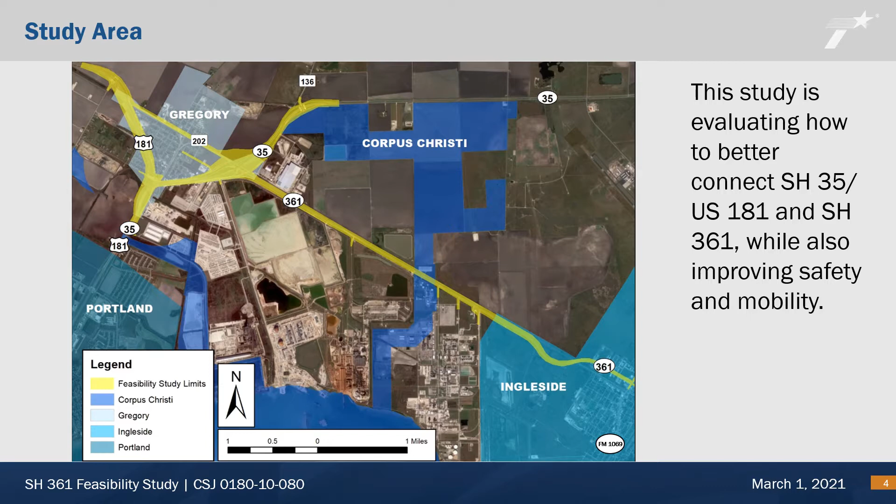During the feasibility phase of project development, engineers and planners conduct studies to define problems, gather data, recommend solutions, weigh the potential environmental impacts, and analyze a preferred concept. This is all done with input from you, our stakeholder.

You might be wondering if the project already has started given all the construction around the study area. In fact, TxDOT has an ongoing project to improve US 181 from FM 3239 Buddy Ganem Drive to FM 2986 Wildcat Drive. This project is widening the roadway to allow for 3 continuous 12-foot travel lanes in each direction, adding overpasses over Childress Street, Sunset Road, and SH35, and providing ADA accessible sidewalks and ramps on the frontage roads. The US 181 project and the SH361 feasibility study are evidence of the amount of growth taking place in and around this part of the state.

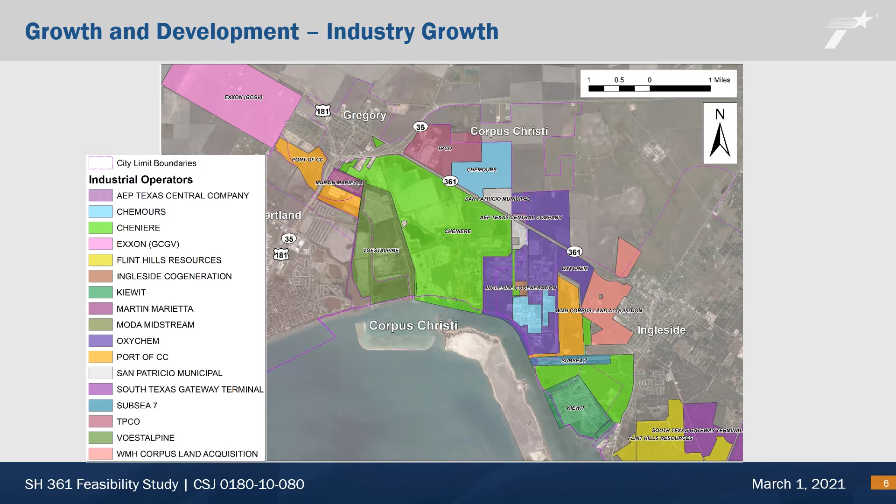The region has seen an increase in the number of industrial operations utilizing SH361. This area has good access to highways, railroads, and the port, and will likely continue to attract similar industries and expansions of existing operations.

Additionally, the city of Gregory and surrounding areas are also seeing an influx of new housing units, both multifamily and single-family residential, as well as proposed commercial sites. This growth is a driving force behind future traffic demand and one of the reasons TxDOT is exploring possible improvements to the SH 361, US 181, SH 35 interchange.

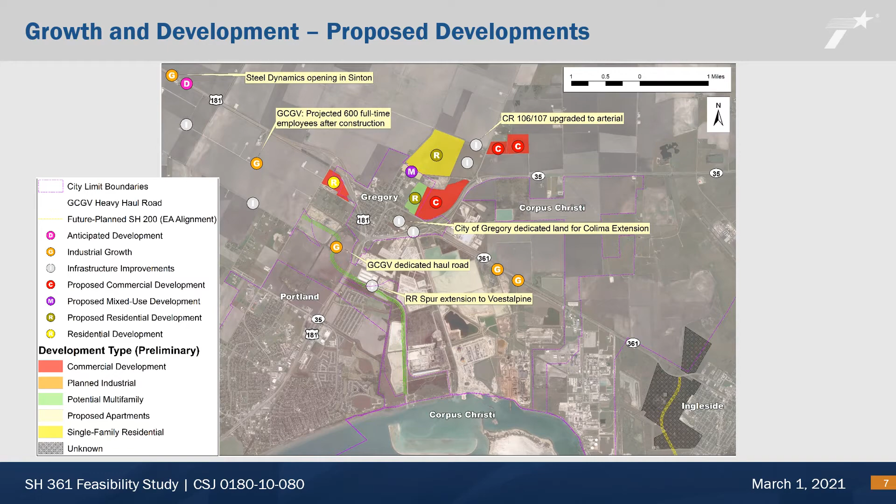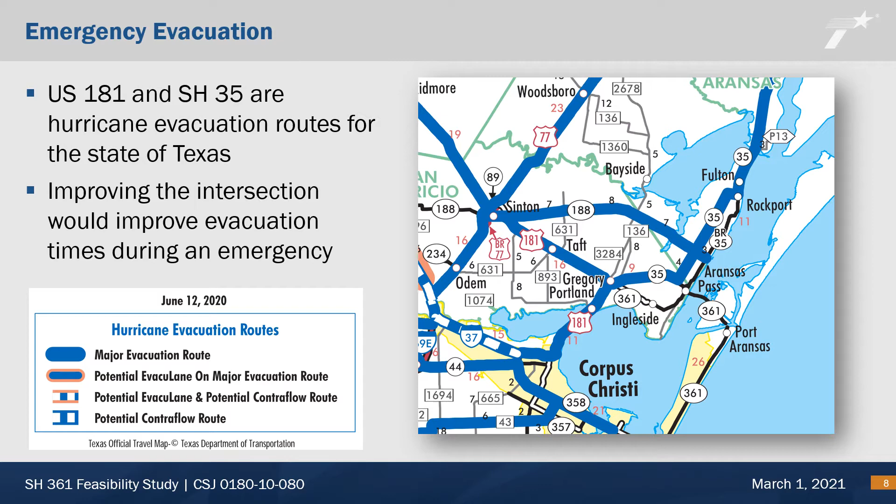Improving operations and safety at the intersections of SH 35, SH 361, and US 181 is particularly important, as SH 35 and US 181 are designated hurricane evacuation routes and need to be able to quickly and efficiently move people out of the area in the event of an emergency.

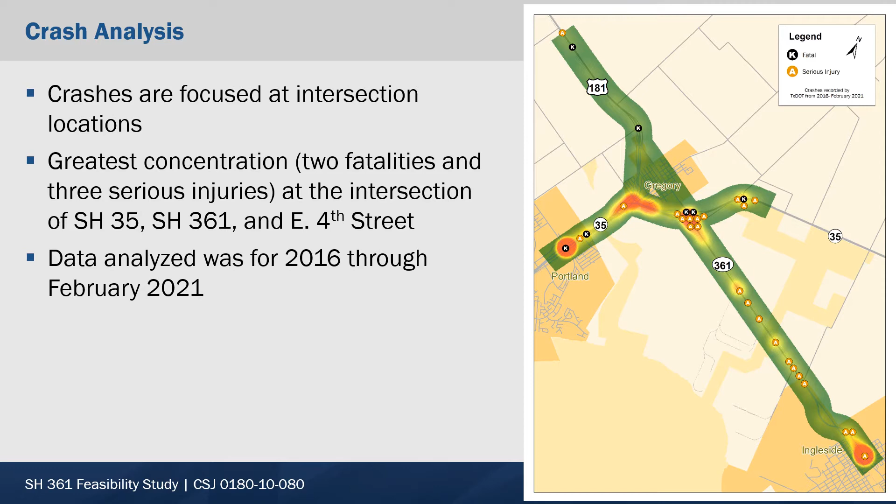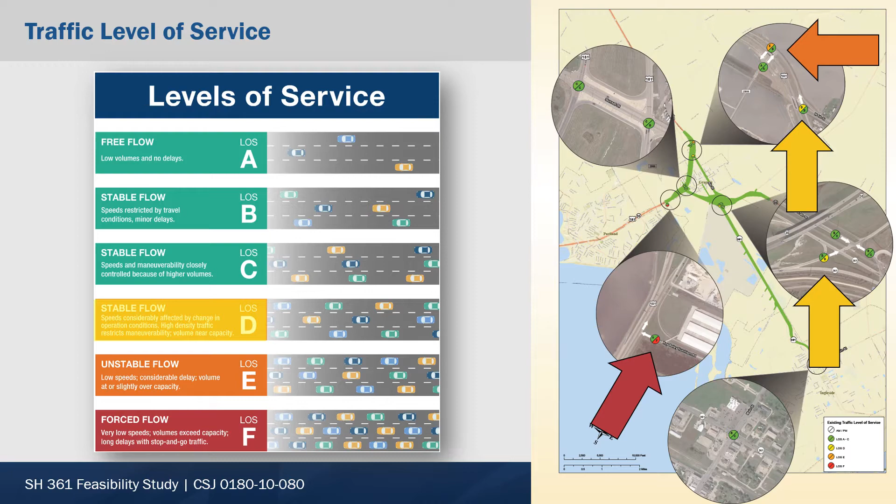Based on an analysis of existing conditions, needs, and challenges, TxDOT identified that the purpose of the study is to evaluate and analyze possible solutions and alignments to manage traffic congestion and delay for future year conditions, reduce traffic delays associated with railroad crossings, provide direct connections for heavy traffic movements, reduce frequency and severity of crashes, and improve hurricane evacuation routes.

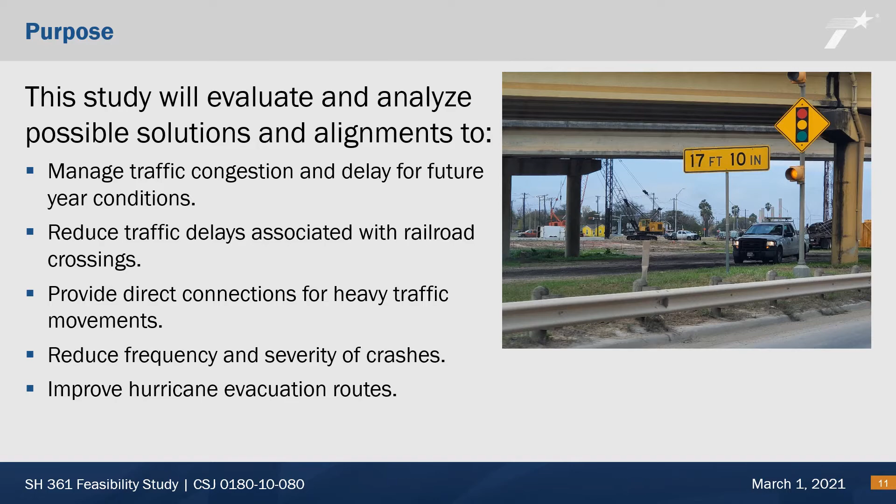This information was presented to the public at an in-person public meeting held on February 27, 2020. Participants were asked to give their input on priorities for the project, as well as identify trouble spots on a map using stickers and handwritten comments.

25 people attended the public meeting, not including elected officials representing the cities of Gregory and Portland, as well as San Patricio County. Comments included challenges related to the railroad crossings and trains blocking traffic. People also expressed concerns about growing congestion during peak hours and challenges with merging and weaving at South Gregory and La Quinta Road.

Using the information collected at the public meeting, TxDOT developed 5 concepts for consideration to improve the SH 361, SH 35 interchange. Concept A is known as an at-grade diamond interchange, meaning the roads entering the intersection are at ground level. A diamond interchange is the most common type of interchange along a highway and is already in place at this location.

The biggest change would be that the road coming from Gregory would be shifted to the south side of the railroad. This concept is low cost and has the fewest impacts to adjacent properties, but it does not meet the goal of eliminating railroad crossings.

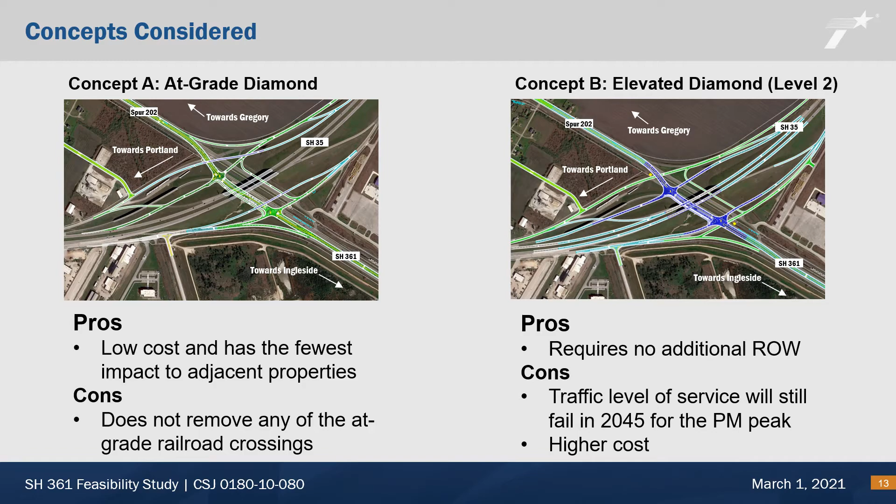Concept C is like Concept B, except in this case, SH 35 main lanes would stay as they are, and the diamond would be elevated above them, creating a third level. This option costs less than Concept B and would not affect operations on the SH 35 main lanes. It also needs no additional right-of-way, but the elevated frontage roads would impact access to adjacent properties near the intersections.

Concept D was uniquely designed to help remove two railroad crossings. This concept would relocate and separate the intersection for SH 361 and Spur 202. Right-of-way would be needed to create a trumpet shape approaching a signalized intersection with the SH 35 southbound frontage road. The design also proposes ground-level ramps and U-turn lanes in both directions of SH 35. This concept would eliminate two existing railroad crossings. However, it introduces a disconnect for traffic coming from Ingleside and heading to Gregory.

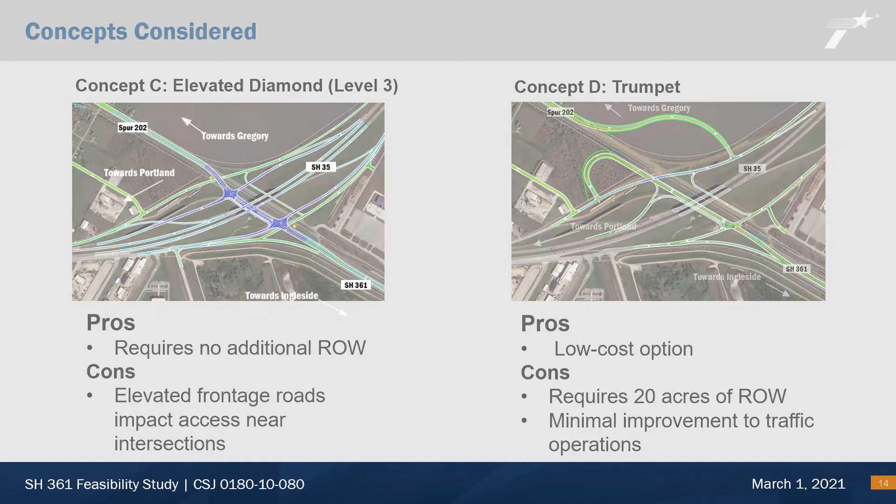Concept E is an elevated single-point urban interchange, also known as a SPUI. A SPUI is an intersection design where a single-point traffic signal at the center of an interchange controls all left turns. This allows drivers to make opposing left turns at the same time and improves the efficiency of the intersection. This concept would eliminate two existing railroad crossings.

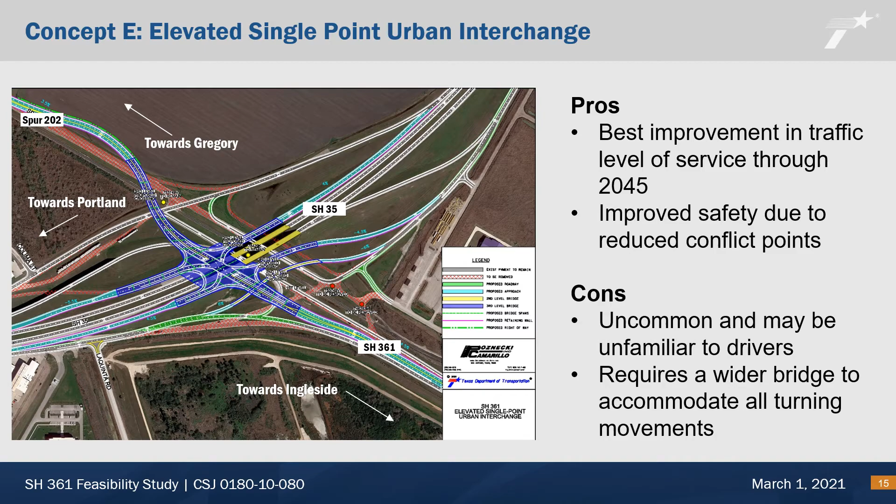It also provides the best improvement to traffic level of service for the morning and evening rush hours through the year 2045. Though uncommon to the Corpus Christi area, a SPUI is a design that is used across the United States and has been proven successful for improving traffic operations. They are also easy to maneuver.

Each of the 5 concepts were then compared to the no-build concept, or in other words, what happens if we do nothing at all and make no improvements. As you can see from this table, these regional routes will be providing significantly less than desirable levels of service in 2045 under the no-build condition.

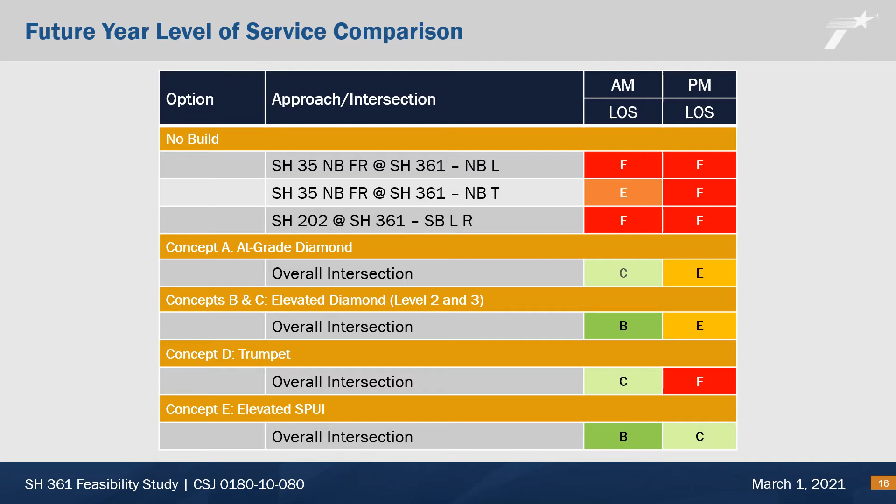By comparison, all of the concepts improve level of service during the morning rush hour, but only the SPUI improves level of service during both the morning and the evening rush hours.

The environmental constraints map shown on this slide was developed to compare each of the concepts and their potential impacts to the human and natural environment. To get a closer look, please go to the Downloads tab on the Virtual Public Meeting page to see the environmental constraints map in its entirety.

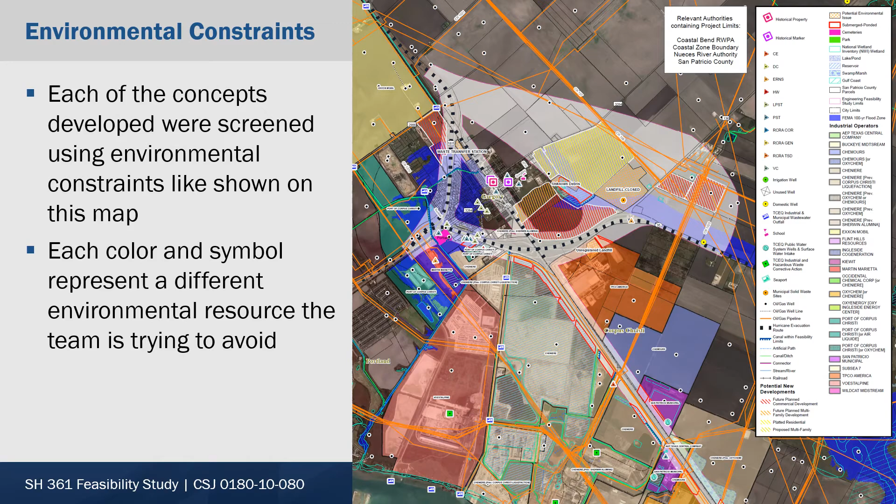Prior to December 16, 2014, the Federal Highway Administration, or FHWA, reviewed and approved documents under the National Environmental Policy Act, known as NEPA. However, on December 16, 2014, the Texas Department of Transportation assumed responsibility from the FHWA through a Memorandum of Understanding to review and approve certain assigned NEPA environmental documents. This Memorandum of Understanding between TxDOT and the FHWA was updated on December 9, 2019. The review and approval process applies to this project.

If the project feasibility study is approved to move into a schematic design phase, then environmental studies would be conducted for the proposed SH 361 project to support an environmental clearance in accordance with NEPA. These environmental analyses are necessary to identify, avoid, and minimize impact to the human and natural environment. Though the concepts show potential right-of-way requirements, detailed designs would be completed to identify exact needs.

Notices for this public meeting were advertised in the Corpus Christi Caller-Times and on the TxDOT.gov website under Hearings and Meeting Schedule. The TxDOT Public Information Officer also prepared a news media release to advertise the public meeting. The study-related materials are available on the project website at www.txdot.gov. Keyword search SH361.

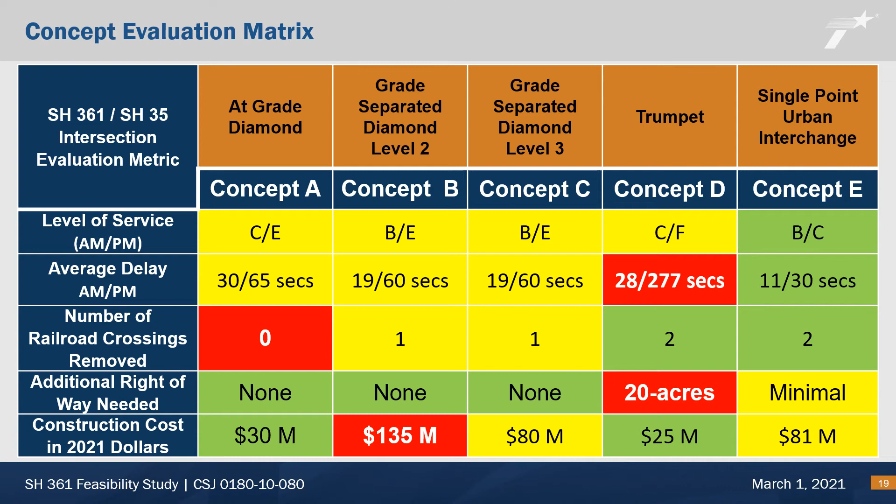As you can see, the SPUI improves level of service and average delay significantly over the other options. It also removes 2 railroad crossings and only requires minimal additional right-of-way. While the Trumpet also removes 2 at-grade railroad crossings, it requires the most additional right-of-way and does not accommodate future traffic for the evening rush hour.

For this reason, TxDOT is recommending the SPUI for the SH35-SH361 interchange. Next, we'll tell you a little more about how a SPUI works.

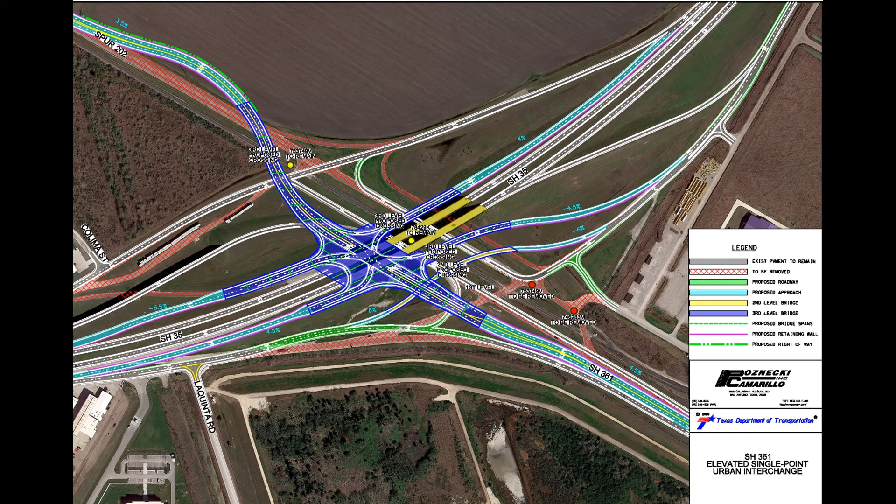Everything you see in blue would be on a 3rd level above the existing SH35 main lane bridge, shown in yellow. This is where the single point interchange would be located and where you would go to get from SH361 to SH35 and vice versa. Additionally, any sections of road you see with the hatched red marks would be removed, eliminating 2 railroad crossings. Those movements would be accommodated on the 3rd level SPUI intersection.

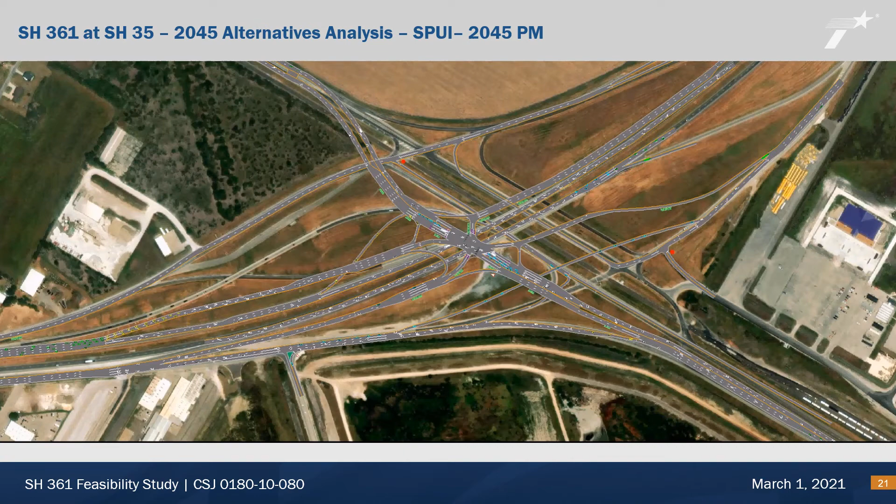TxDOT traffic engineers developed this model using future traffic to show how the SPUI will work to handle traffic through 2045. If this concept moves forward into schematic design, a more detailed 3D animation will be created to show how the interchange will operate. Next, we'll show a short video that explains how a SPUI works.

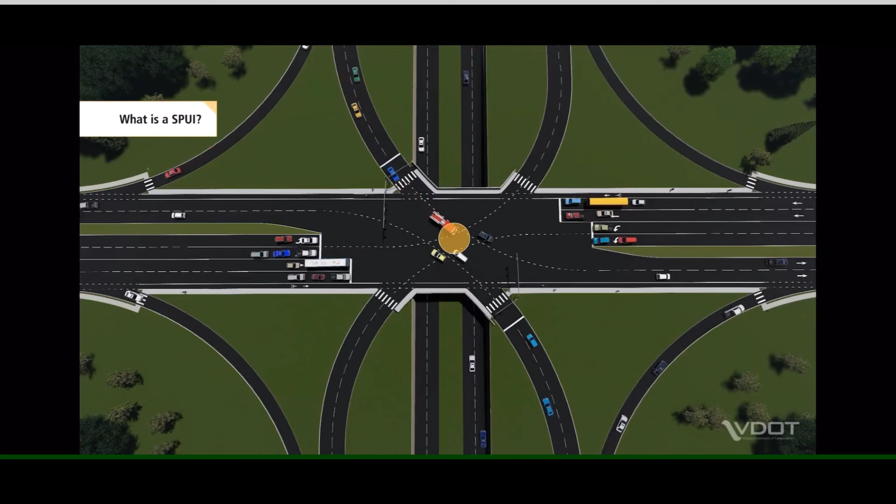The Single Point Urban Interchange, or SPUI, is one type of innovative interchange. A SPUI is an interchange controlled by one signalized intersection. All freeway ramps begin or end at this single signalized intersection. Right turn movements onto and off the freeway ramps are made at stop or yield controlled intersections separate from the main intersection. Let's take a closer look at how a SPUI works for motorists.

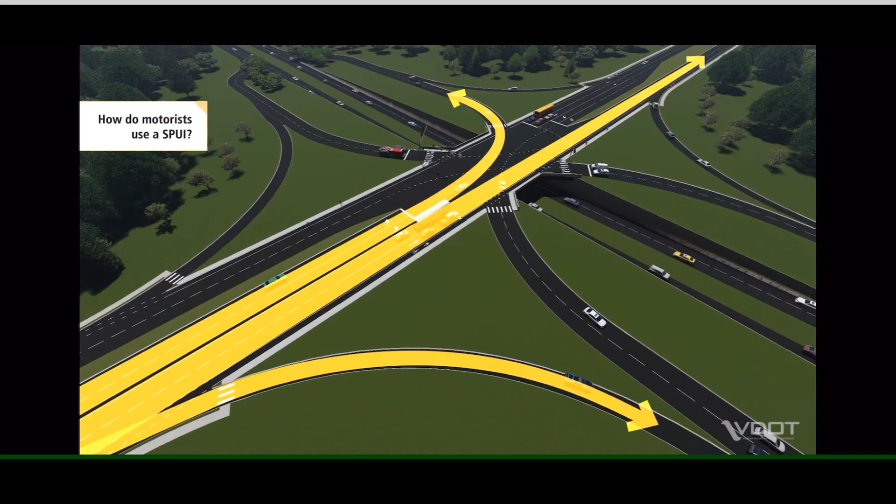Motorists navigate a SPUI like a conventional diamond interchange, except all movements are made at one traffic signal rather than 2. From the arterial, motorists can turn left or right onto the freeway ramp or continue straight through the interchange. From a freeway ramp, motorists use left and right turn lanes to turn onto the arterial.

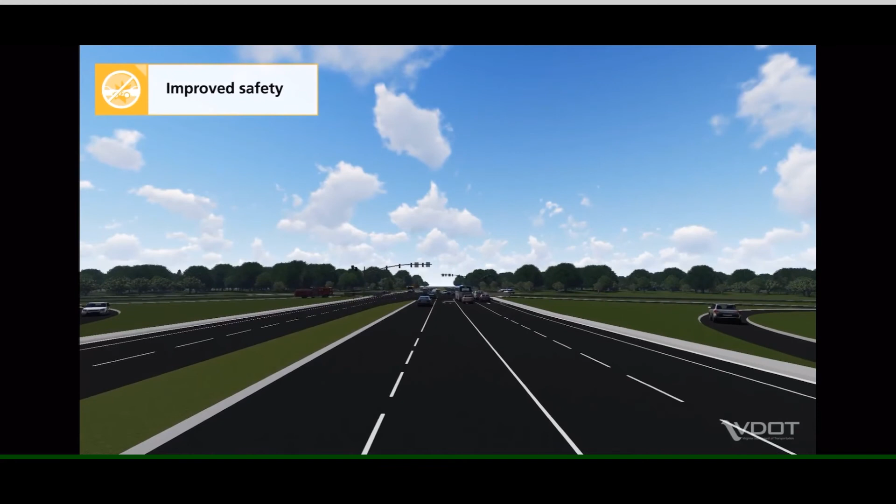There are several benefits of a SPUI design, such as improved safety. SPUIs only have one signalized intersection, which means vehicles only cross paths at one location rather than 2, like at a conventional diamond interchange. Increased efficiency.

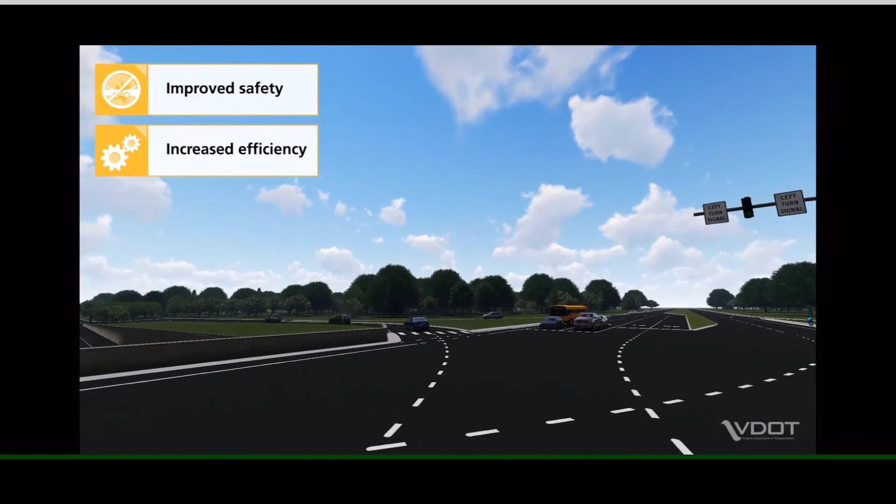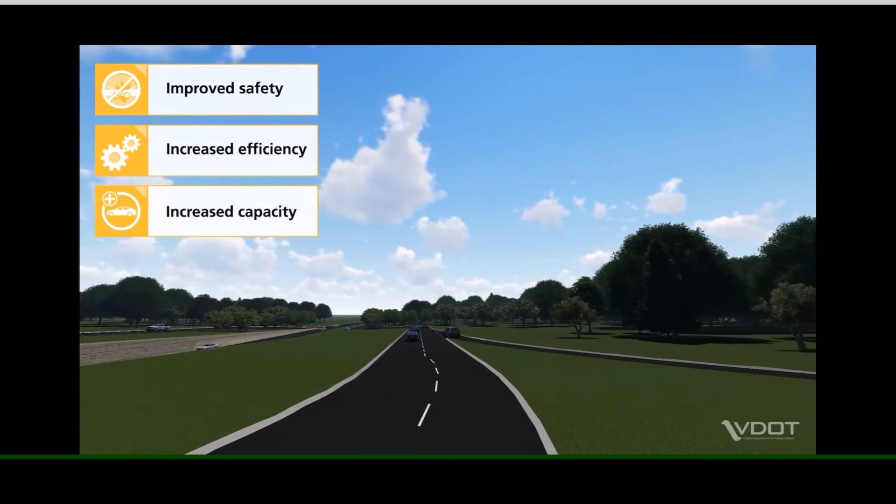The intersection at a SPUI operates with fewer traffic signal phases, which allows the interchange to operate with less delay than conventional diamond interchanges and improves travel times on the arterial. Increased capacity: at SPUIs, left turns can be made at higher speeds, which increases the capacity of the main intersection and allows the interchange to handle a greater volume of traffic.

Now let's talk about the schedule of the project. The construction for improvements identified by the study is not currently funded. The project team began work on the study in late 2019 and met with local agency stakeholders and the public to receive their input in February 2020.

The next step in the process is to develop an environmentally cleared schematic design. TxDOT would then develop detailed plans, specifications, and estimates. The earliest the project could go to construction is in 2025.

We are requesting the public's feedback on the concepts considered and recommended for moving forward, which were presented today as part of the virtual public meeting. All comments received will be considered and incorporated as appropriate into concept design.

After addressing comments received during this virtual public meeting, a public meeting summary report will be prepared and posted at www.txdot.gov, keyword search SH361. TxDOT will then move forward with developing a schematic design and securing environmental clearance for the preferred concept if appropriate. Additional public involvement opportunities will be offered throughout the schematic design process.